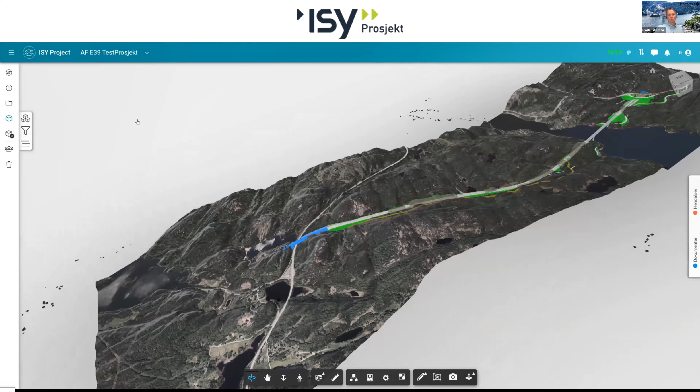So are you seeing my screen now? I am. Yeah, the application is called ISY Prosjekt. We call it the ultimate project collaboration platform, and it's based on Forge. And here we have the models. This is set together with lots of different models. So I can select the various models here for various people.

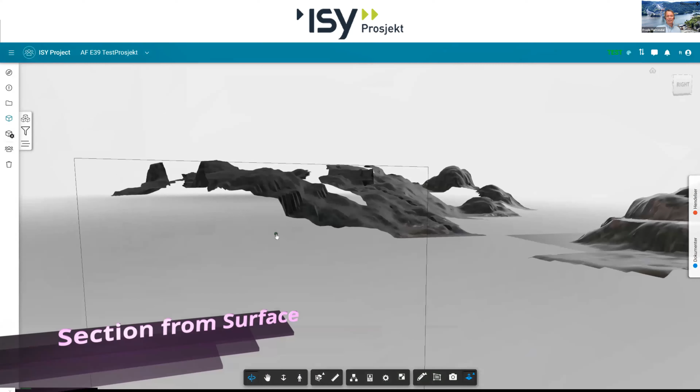And we have set it up here with different viewpoints, so it's easy to navigate to the correct place in the model. And also this was something we built before it was introduced in the Forge viewer. We create a section from the surface, but this is now a part of the standard viewer, so we will change that. But when we set this section out, it's a very valuable tool here for creating annotations.

We can, like I do here, set out parameters that's on the elements. I set the MMI, that's the model maturity index. It's at the 200. That means that the concept is set. We also have other types of annotation that's possible to set. So this is like the height above sea level here.

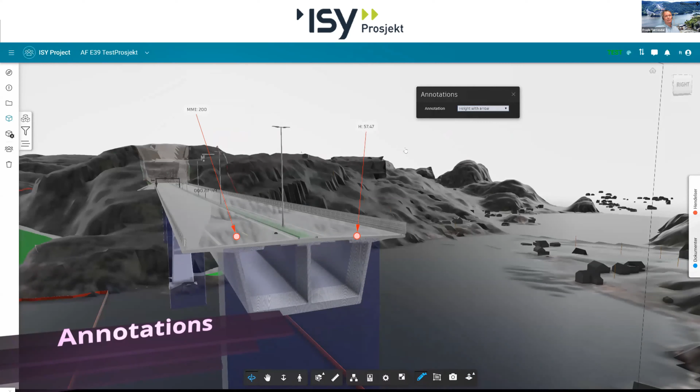So this is sort of things we have done just to improve, so smaller things for them to improve the viewer. Also, there was a need to measure the area in 3D. That's not possible in the viewer today. So we made a simple tool here to easily measure area in 3D.

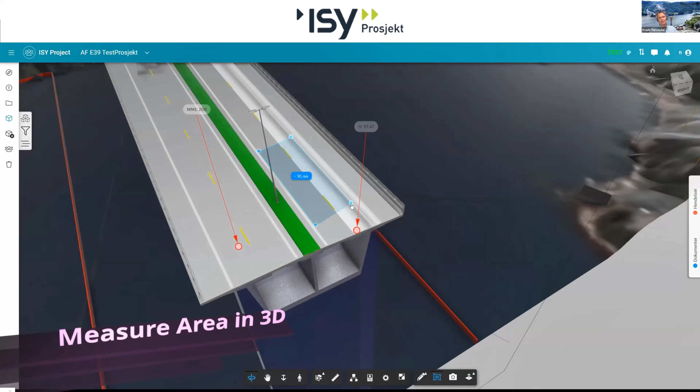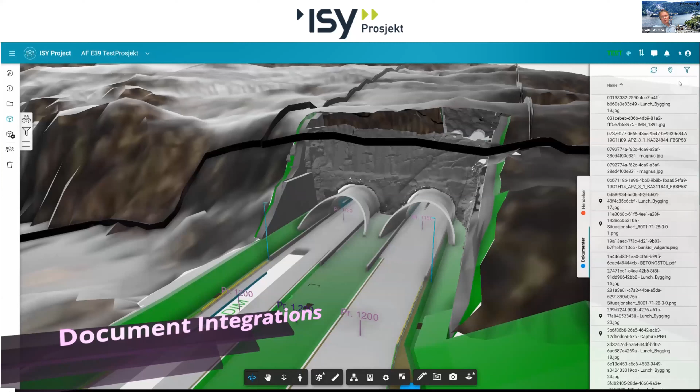And also, we made some integrations here, like was mentioned earlier, with other applications. This is documents that come from SharePoint, and we have, it's like a heat map, where they have these hotspots in the model where some of the documents will be geo-referenced and will be visible in the model like this, and with a tooltip, so it's easy to see where the various documents are located.

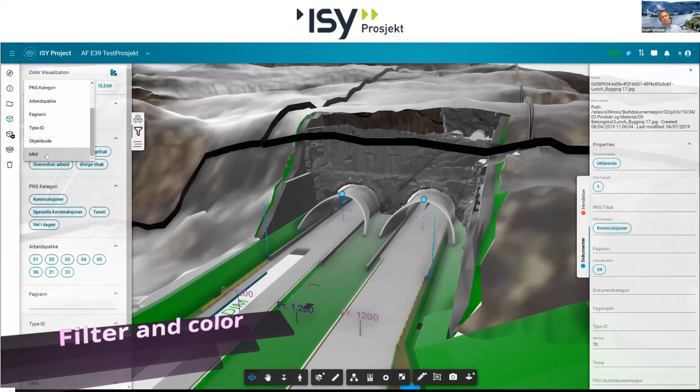We also made a very easy to use filter to filter out the correct information. And also to set the colors on the model based on this filter here. Again, we use the MMI to very easily display how far the engineering has come at this point, just with seeing the colors in the model.

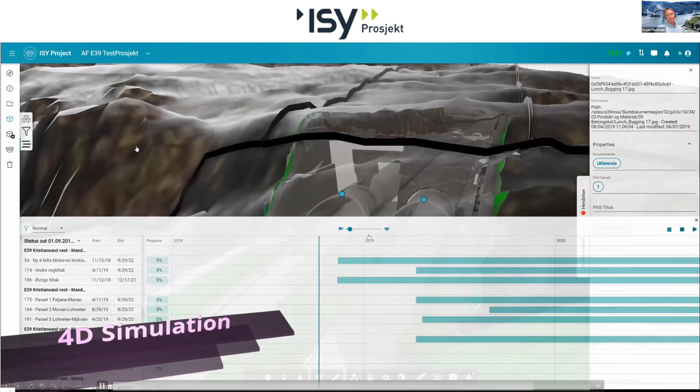And also we have this 4D simulation where we integrate with the progress in the project, so that is also integrated into it. So this is just a very short display of what we have done here.

That's awesome. In terms of how Forge helped build that solution, you guys used the viewer, you used model derivatives, data management, you used a lot of our APIs. Yeah, we used of course the authentication and model derivative and the webhooks and the viewer.

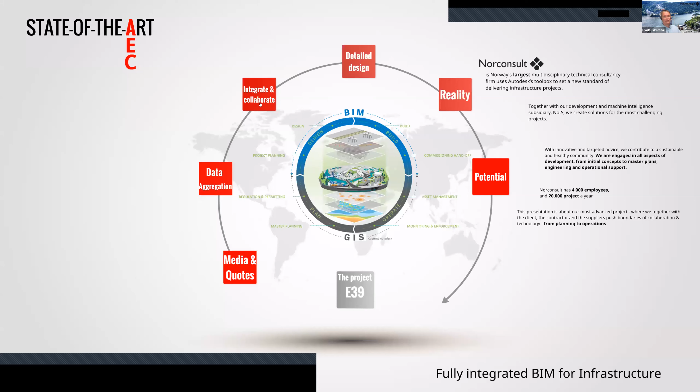Okay. In our application here, we built it using C# and .NET Core, and for the front end we used Angular, and also we used the microservice architecture. So our model is its own microservice. And then right here, all the integrations you guys set up using Forge.

Is that right? Yes, we did quite a lot of integrations, because that is one of the key points here, to have all information available in an application for the ones that need the information. So we made SharePoint documents in the contractor's SharePoint portal available. Also environment, health and safety issues are made available with the same type of hotspots.

And also the last thing I showed in the very short demo was they're using Microsoft Project for the planning, and we're visualizing this for the module that we have made. Frode, what are you using for GIS?

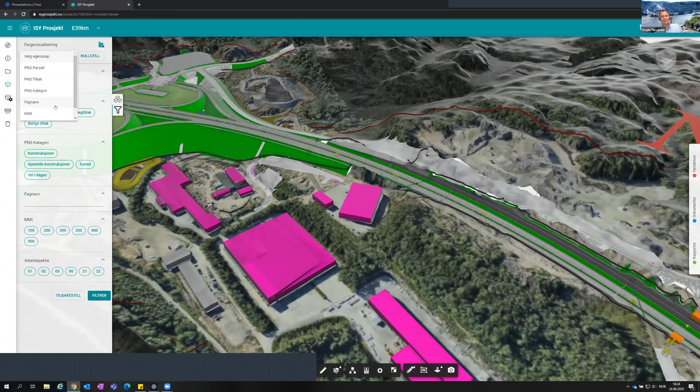The GIS, this is something we are working with now, and we used it in the SharePoint portal. We made an add-in to that one with a GIS, and we have our own GIS department that makes its own GIS tool, but it's based on OpenLayers. So we have our own GIS tool. Interesting.

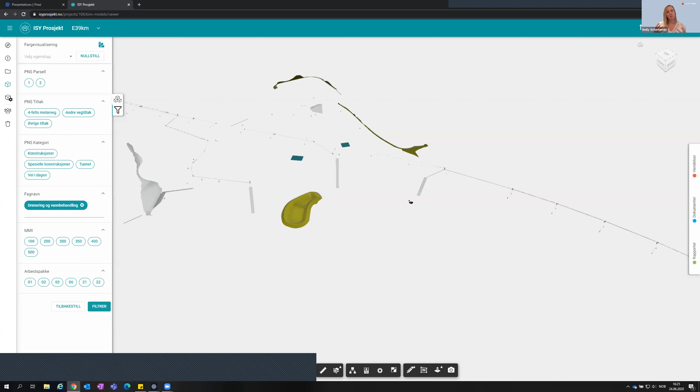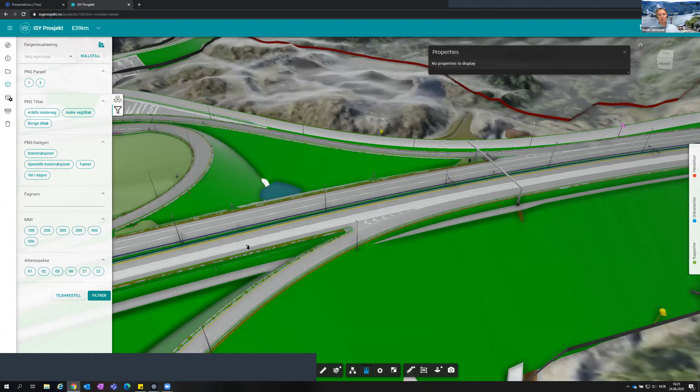And then I think you touched on a couple of challenges that you saw along the way, but can you bring forward what the main challenges were as you worked on this very complex project? Yeah, the main challenge was the sheer amount of data, it's very large, very many models, and also the number of properties on each object.

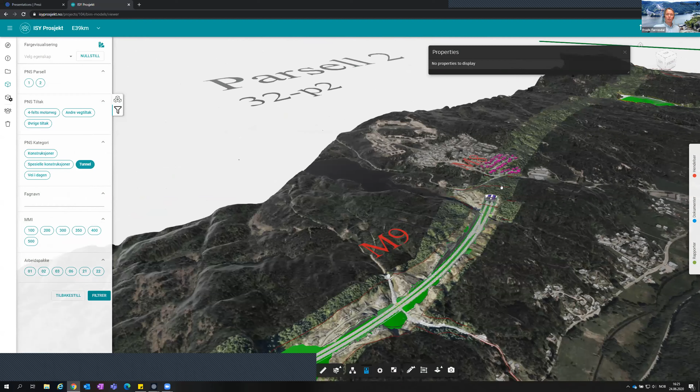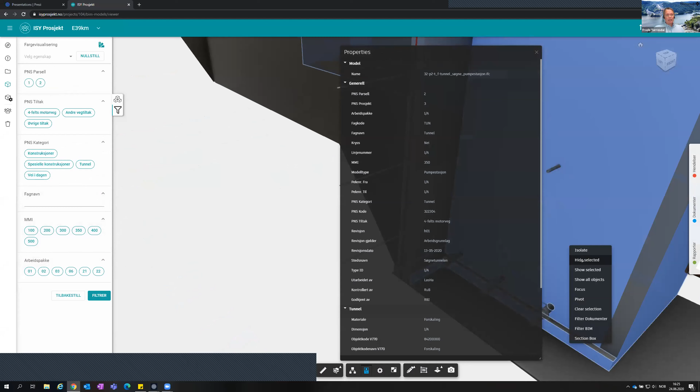It's very large, so finding a very easy way to filter out and show only the necessary information, that was one of the main challenges. And I think we have solved it in quite a good way with a very easy to use filtering, and also to filter out in the browser, in the viewer, only the information that is valuable to the end user. And one of the other things that was quite difficult to do was the offline mode,

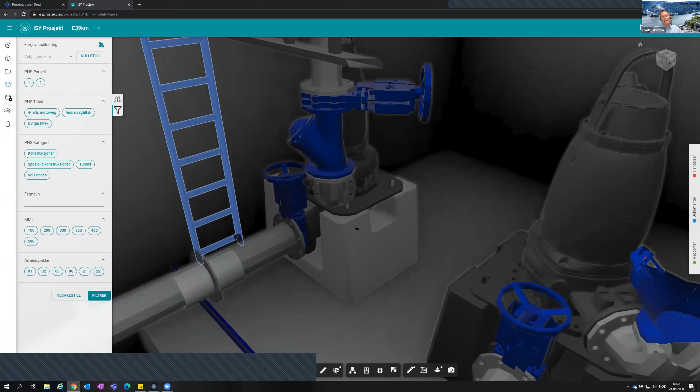especially on handheld devices, because you have a limited amount of data that is available to the handheld devices. But we got very good help from several people from Jim's team. We got it working using service workers. So now it works quite well on handheld devices, and also on desktop computers and laptops in offline mode.

And also sectioning was and is still not optimal, because when you set a section using the standard section tools, you get this gizmo to move it, and that is placed in the middle of the bounding box of what's shown of the model, and when you have a several kilometers or miles long model, the section gizmo is never where you really want it to be.

Sorry, just for my knowledge, when you're saying sectioning, you're talking about kind of breaking up the project into components of the road, or? Yeah, no, setting a section, creating a section in the 3D model, using the section tool in the viewer.

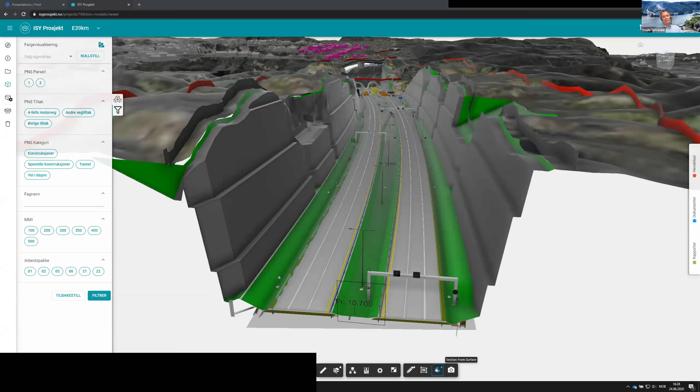So Frode, I got a question for you, because these are big public projects, governments, bureaucrats. How'd you deal with security? Did you have problems with data sovereignty questions, that kind of thing? Yeah, well, we have a login, so you have to have a user to get into this project. At the moment, we only have a project owner or manager and a BIM administrator that has extra rights to set things.

But we are working on setting various roles, so we could have like a public role where everyone could log in, just make a user and see just a small part of what's available here. But of course, if we were to include the pricing or something in here, that would be only for the very few to see those kind of data. So we are working on that now to have these access roles in the model.

Are you using SharePoint and kind of Active Directory and OAuth 2 for all of that, or do you handle that some other way? I think we're going to handle this some other way, and not base it on one of those systems, so we have our own system that can handle it. Sorry. Yeah, in this case, our contractor wanted to use SharePoint, so that's one of the reasons for integrating that part of it. Okay, I guess as a system integrator, you have to use whatever the client wants, maybe it's SharePoint, maybe it's Active Directory on the cloud, maybe it's LDAP or one of these older standards. Yeah.

Yes, and also we are still having a little bit of problem with the dimensioning. The people that want to set out dimensioning or measure in the model, that's still a little bit hard to do. So if I could come with a little wish here, it would be very nice if you make a section in the model, if you just could dimension on the section that is made, because that's sort of a 2D thing that would make more sense for some people. Because when you have this model with lots of data, it's very hard to hit exactly where you want in the 3D model when you want to measure like the width of the road or the height from somewhere.

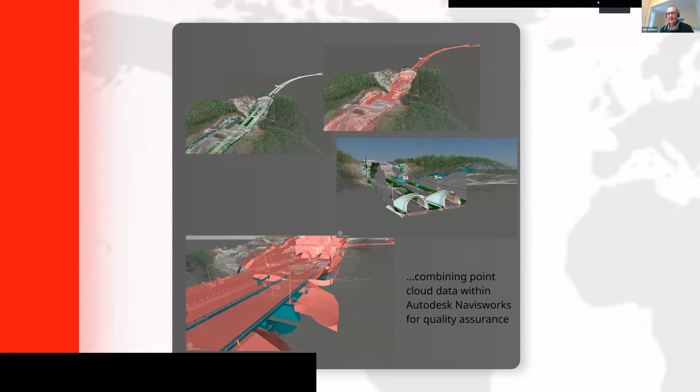I think the last question that Matthew asked was, how is progress on the site measured, captured, integrated into the viewer platform? Oh, that's a big question. That is a big question. Yeah, one part is maybe you saw that in the video from Frode, the blue layer that we put on the models within the LOD or maturity. So applying properties to the objects and having the possibility to filter them and present what models are actually being built. That's one part of it.

And the other part is connected to the integration with SharePoint. So you apply the different documentation that is uploaded into SharePoint and then connected back to the BIM models. So you could filter out the documents, see what kind of reports or assessments or surveying has been done to the object, and then get some kind of perspective of the progress.

And you mentioned for project management, you use Microsoft Dynamics. Again, I've seen P6, Primavera. How many different ways are there to do 5D? There's a lot, and there's not one way. I do think an important part of this is also that ability to have applications or websites, or maybe a native mobile app, being able to have easy access in the field.

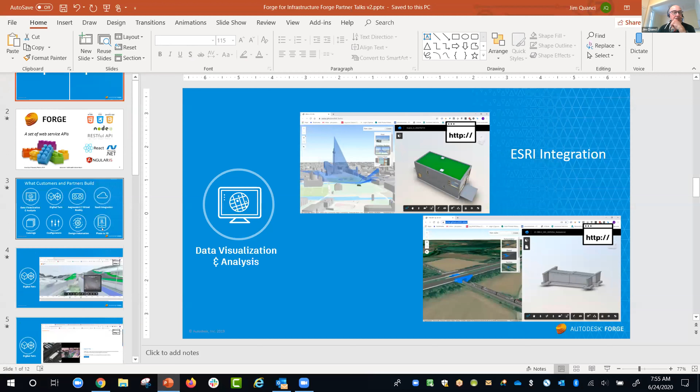Okay. Jim, do you want to? I think you have 6 minutes left, if you wanted to share another example. Yeah, so I'm gonna jump into that. Given we don't have much time, I'm gonna do two examples here. Let me find my browser. Here we go. Where is the one I want? I should probably just click and find the right one. I have lots of examples of digital twin kind of stuff.

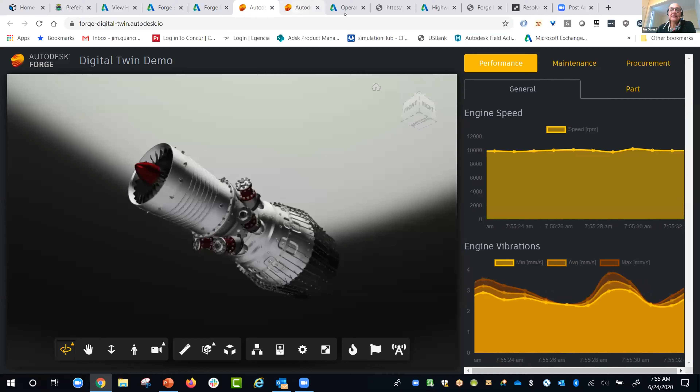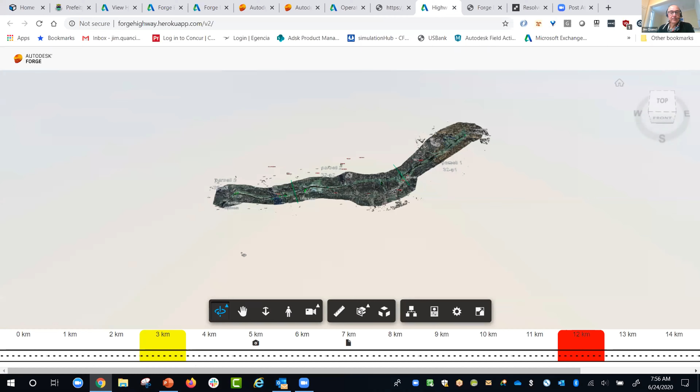Here, and this will be a good one because this is actually a piece of road that Frode gave us. So this is 20 kilometers of highway, and dealing with 20 kilometers of highway in the viewer on a desktop is kind of pushing it. If this was segmented down to 5 kilometer chunks, it would probably work a whole lot better. Let me get this out of the way. It's still loading. It's such a big piece of highway.

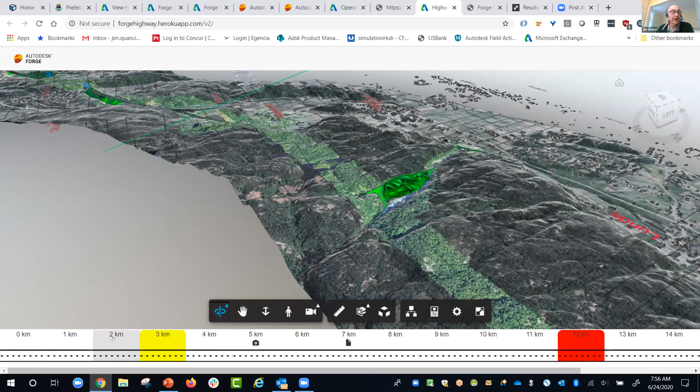So this is the project that Frode and Jerry were talking about earlier. Just to show people what's possible on the operations, at the bottom here you can see kilometer markers. So here's a yellow spot over kilometer 3. So we hit kilometer 3. Here's the model, and here's a picture, and it shows potholes.

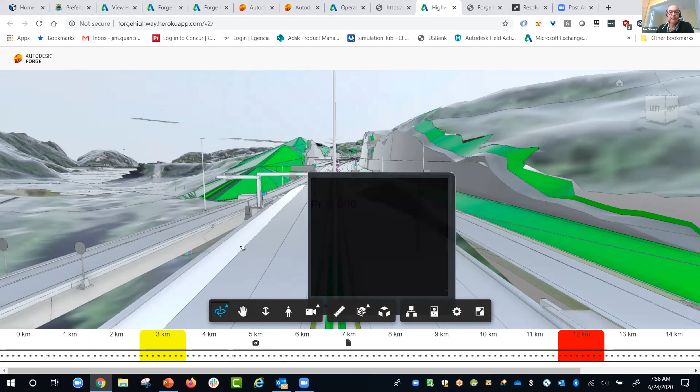Or somebody took a picture, it's not yellow or red. And it's actually showing a real-time video feed of what's really happening. And I don't know if this real-time video feed's going, oh, there it goes. Now, this isn't actually this highway. We found the video feed somewhere else, just to make the point.

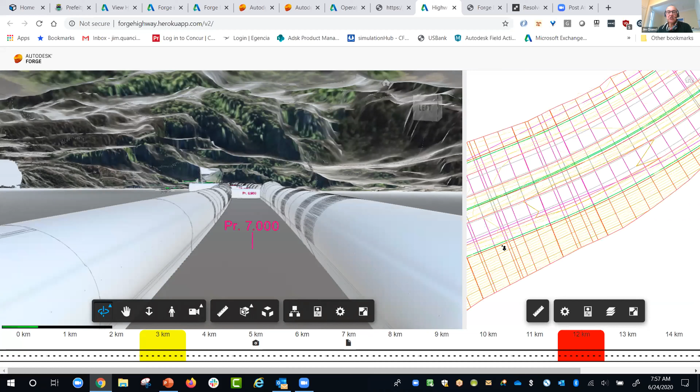The real point is, though, this kind of very easy to understand model-based interface that allows you to get information. Here's drawing information, alignment information you might use during construction. I showed you operating. Here's red. Well, what's going on here? A little bit of a landslide. This embankment has fallen down on the model.

This was built by one of my web engineers in 2 days, using an existing model. And again, not optimized. It was just showing people what's possible. And it's actually an example like this that has gotten people in the UK, in Australia, in the US, in Belgium, and all over going, ooh, we can hook up our maintenance and operations, we can hook up our CCTV, we can hook up security, and we can create a single pane of glass, a single simple interface. And we can give different people different access to different information.

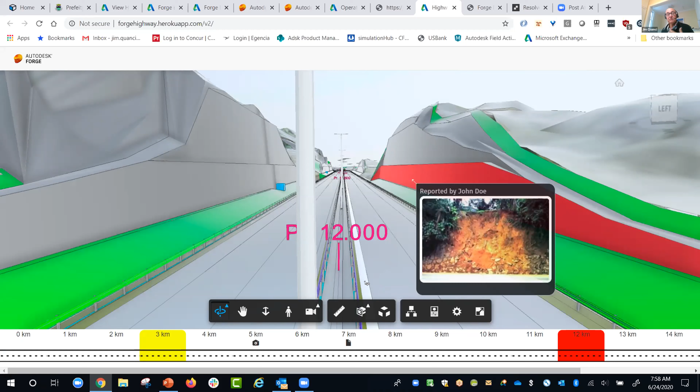And potentially, and again, this is an example, not optimized for mobile yet, but you'd want a version for your phone, for your tablet, if you're sitting at a desktop, so you can manage a piece of road. This is one of the examples. It's funny. I remember 4 or 5 years ago, somebody said, "Hey, I want to do 2 or 3 kilometers," and we were kind of struggling with it. But we've made enhancements in the viewing technology and the technology that delivers the model, that all of a sudden a couple of kilometers is not a problem.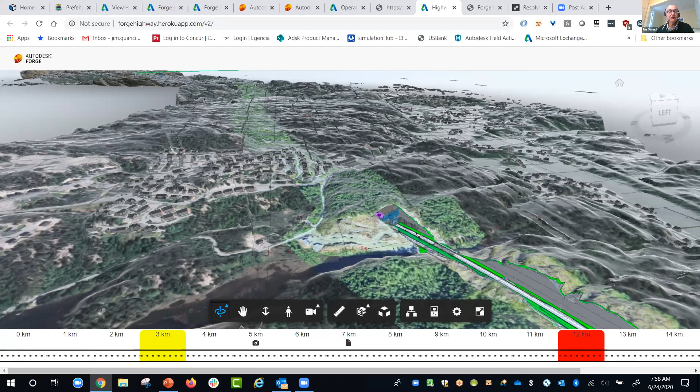And again, 20 kilometers is kind of pushing it. It's probably on the bleeding edge. Some kind of segmentation or tiling would probably be a good thing. But we have improvements coming that, I think by the time we get to late this year, working with 20 kilometers at a time, it's absolutely something you can do.

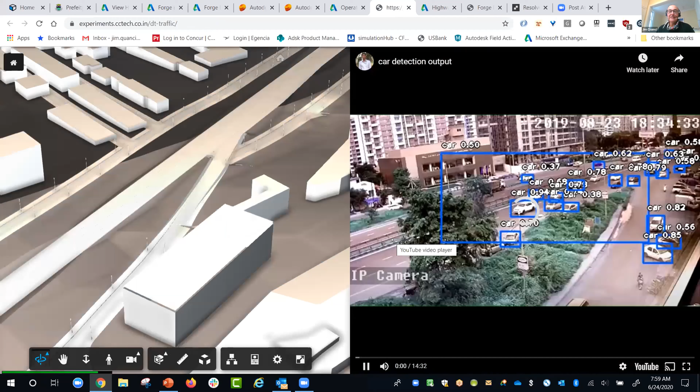I thought I'd show one more. This is built by one of our Autodesk certified system integrators, CCTech out of India. And this is cool. So on the left is a model, and that's a Forge-powered model. On the right is a single fixed camera that's using AI to identify cars. And with a single fixed camera, when you pipe that information into the Forge viewer, I can now change my point of view.

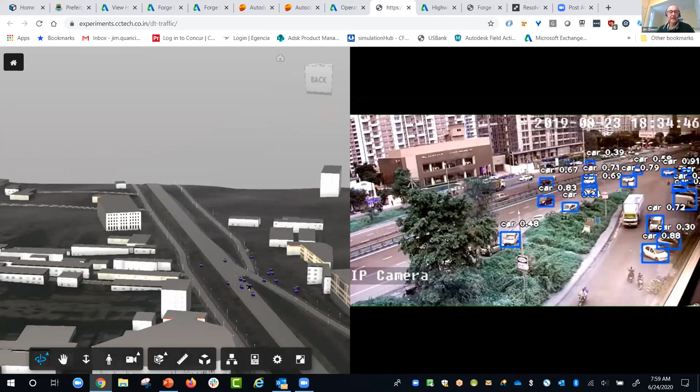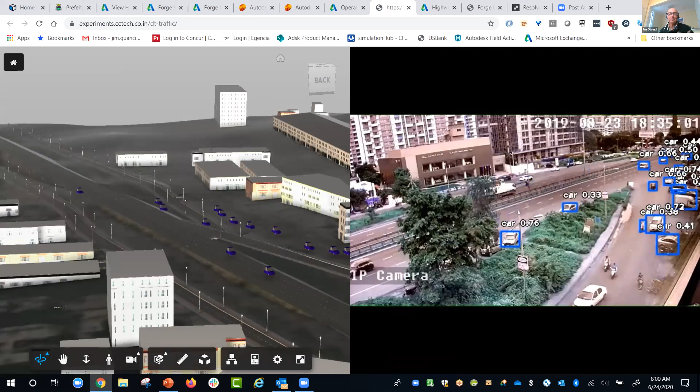And maybe more than that, behind the scenes, I'm actually getting data on every vehicle that I can do analytics on. Maybe I pull it into Power BI or some analytical tool I have to measure traffic patterns. But once it's in a model, it's very computable versus this still camera. And tying the two together, I think this kind of thing is cutting edge at the moment. It's not going to be cutting edge 5 years from now. It's going to be kind of normal, standard. It's how you manage rail, roads, terminals, bridges, stations.

When 2 engineers part-time in a month can hack something like this together and present it on a web page that any of you can go to, experiments.cctech.co.in, and you could see what they did.